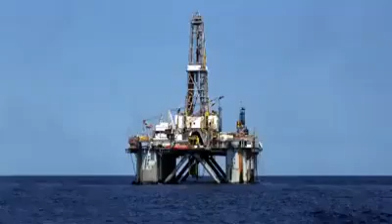Offshore drilling rigs have all the functions of onshore rigs, but also need to stay on station in a variety of sea states and allow for secure connections between the surface and the sea floor.

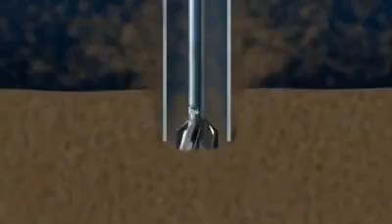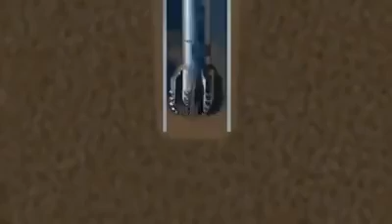To start an offshore well, a thick-walled, large-diameter hollow tube called a conductor is embedded in the sea floor, with the aid of a bit that jets away the sediment with high-pressure seawater. When the conductor has penetrated about 250 feet, the jet bit is retrieved and a drill bit introduced. The cuttings are just washed to the top of the well by seawater pumped through the bit.

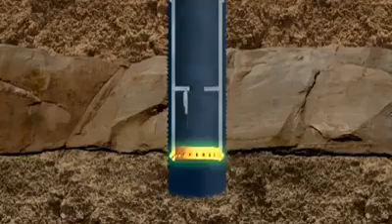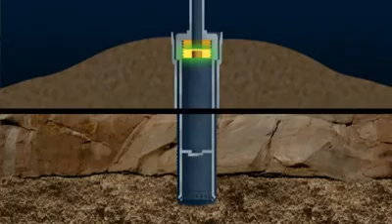A second run of conductor is now lowered into the hole. At the bottom of the conductor is a guide shoe that stops the conductor snagging on the well bore. Above the shoe is a flap valve called a float collar. A cementing tool is connected to the top of the conductor. A plug that pushes the seawater out is driven downwards by high-pressure cement that fills the conductor.

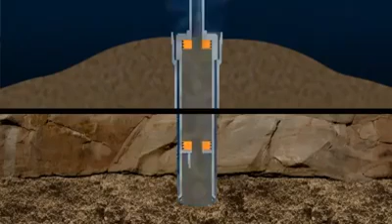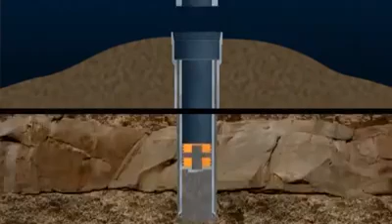On reaching the float collar, this plug is ruptured, and cement flows out of the bottom of the conductor and up the annular space between the wellbore and the conductor. The cement plug tool is removed, and when the cement has set, drilling continues with a smaller diameter bit, penetrating the cement plugs and float collar and into fresh rock.

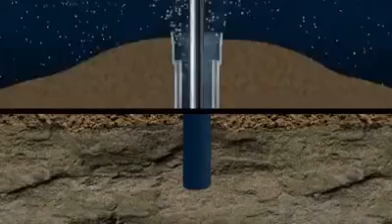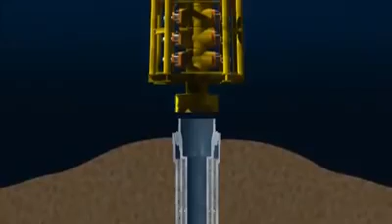After a suitable depth has been drilled, the drill string is removed. Then steel tubing, known as casing, is lowered into the hole and cemented in place. This first casing run has an attached wellhead. A blowout preventer, BOP, a robust set of valves that can shut in the well even if the drill string is down the hole, is then lowered and locked onto the wellhead.

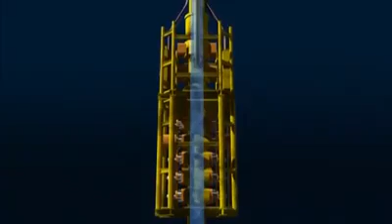The BOP is connected to the sea surface by large diameter tubing known as a riser, which allows drilling fluids to be returned to the surface. From this point onwards, the drilling procedures are similar to those used to drill an onshore well.

With the riser in place, seawater is replaced by a special fluid known as drilling mud that is pumped down the string and exits through ports in the bit. The mud not only cools the bit, but also clears the cuttings from the hole. The cuttings are captured at surface and examined by geologists to characterize the rock types that are being penetrated.

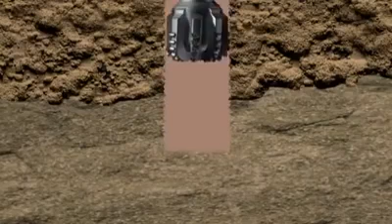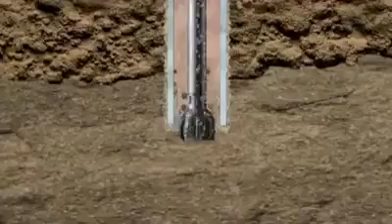As drilling continues, sets of decreasing diameter bits and casing runs are used as the well penetrates deeper into the rock. Each run of casing is cemented in place to provide integrity, a sealed system from top to bottom. The density of the mud is controlled by the mud engineer, adding dense minerals when needed. The aim is to produce a column of dense mud which exerts sufficient pressure in the well to counteract pressure from fluids encountered in the rock.

This combination of the dense mud column, contained in properly cemented casing, aims to control pressures in the well. The BOP provides a further level of security. When the well penetrates a potential reservoir rock, the oil or gas may be detected by analyzing the drilling cuttings for traces of gas and/or oil. At this stage, it is essential to gather as much information as possible about the reservoir. Two methods provide most of the information.

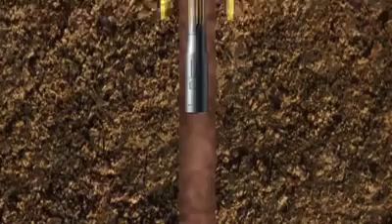In the first, the drill bit is replaced with a diamond-studded coring bit at the bottom of a core barrel. This can cut a complete section of the reservoir rock and return it to surface for detailed analysis. In the second, coring may be replaced or complemented by running a suite of geophysical logging tools, which are run on electric wireline. These are instruments that can measure the physical properties of the rocks as they pass slowly through the well bore.

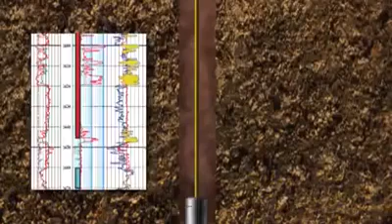When as much information as possible has been gathered from the reservoir, a decision is made on whether to complete the well for production, suspend efforts with the option to return to the well at a later date as more information on the reservoir becomes available, or to plug and abandon the well.

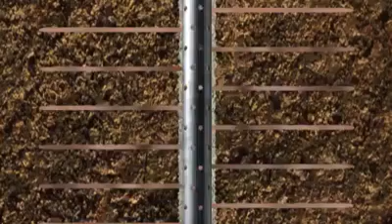If the well is seen to have production potential, the reservoir interval is lined with casing. The casing is then perforated to allow reservoir fluids to enter the well and travel up the installed completion production string to surface.